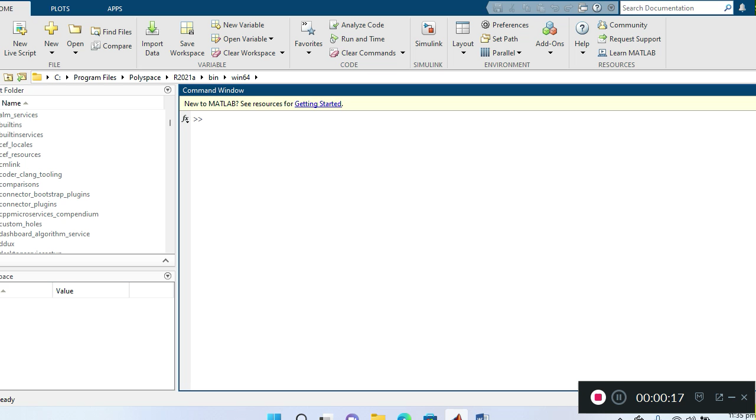So we open straight on to our Matlab and we go to Simulink. In Simulink, we open a blank model, and from the blank model we're going to go to the library browser. When we have the library browser, first let's look for our elements.

The first element we're going to look for is the three-phase source, typed as three-hyphen-phase source. Let's go to enter. Okay, I made a little mistake here - instead of source, I wrote 'cost'. Let me change that to source, and now let's enter. Let's just spell our source correctly, and now let's go to enter. Now our three-phase source pops up for us.

We just drag it and drop it. Good. Now we're going to need an RLC load impedance.

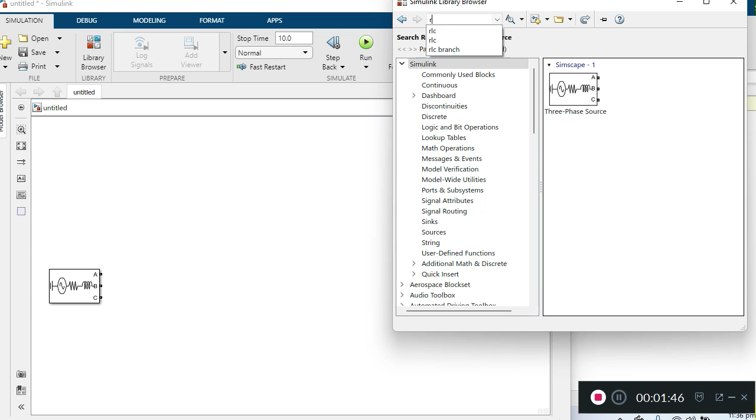So let's just type RLC over here, and then click on enter. Let's see the kind of RLC load impedance which is going to work for us. I think this would work for us, so let's just drop it.

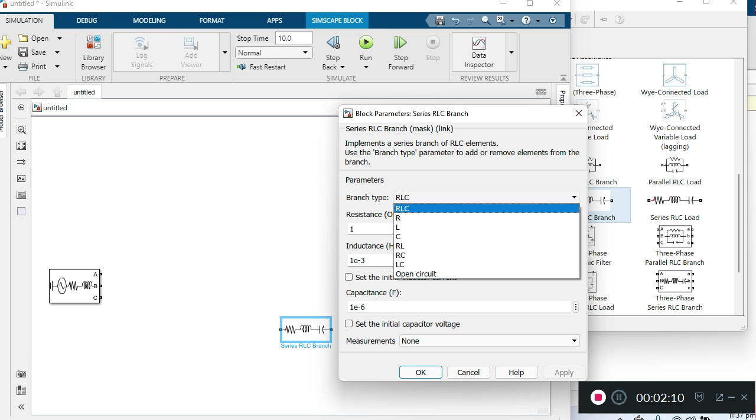We can just double click on it. A dialog box opens for us and we can make any kind of change that we want to our RLC load impedance. I want an RL, so when I choose it, I get my RL, and then I go to OK, and it does everything for me.

Now I want to be able to copy this, so Control C, and then paste it, Control V. So that is cool. Now I want to rotate this, so I can right click on it. When I do, it opens up, and I can select rotate and flip, then clockwise, and it just does it for me.

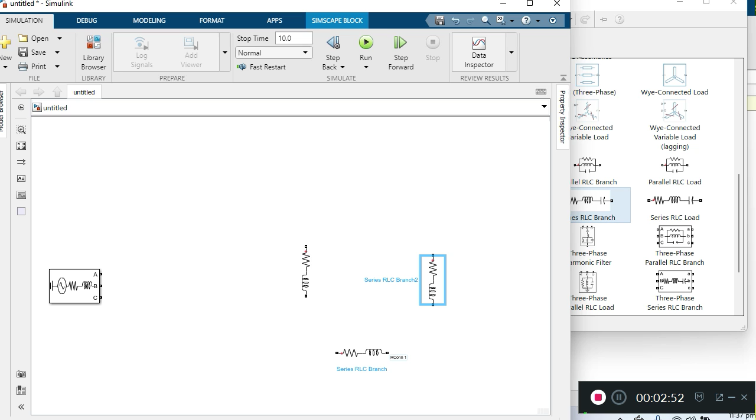Now I can just copy this and paste it. Good, so everything is that cool. Now I can connect my RL loads to form my delta network. So this is a delta network.

If you have a problem with the theory, you can let me know and I can help you to handle it. Now A will go to A - I'm connecting. This part is called the line or the source, and this part is called the phase part. So I'm just connecting the phase to the line or to the source to form my three-phase delta network.

So here is a balanced delta network. If you need explanation as to why we call it balanced delta, you can let me know and I can help you to deal with that.

And then C will come over here. All right, now that's cool. Let me just adjust this a little bit. Okay, cool.

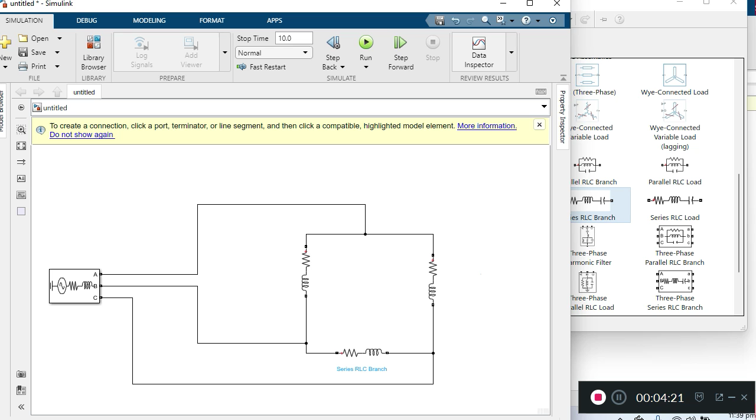Now I'm going to need some instrument for me to be able to take the readings of my voltages. Let me come back here. I can write, let's say voltage - is it voltage? Let me just write voltage measurement. Is it measurement? Okay, let me just check if it's now right.

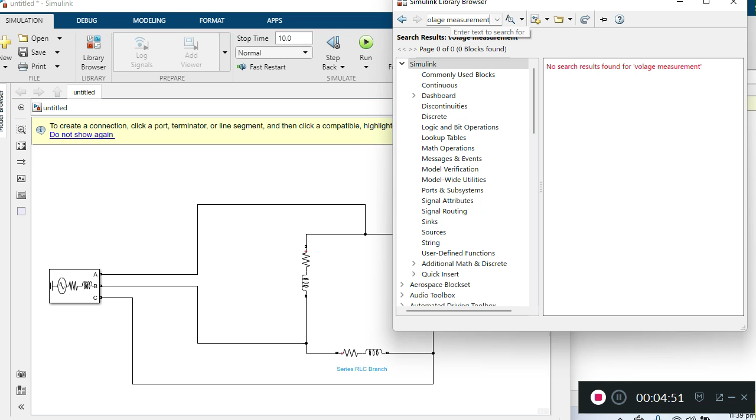I think I've not spelled this correctly, so let me just do it again. Control A. Okay, so it pops out for me. This is my voltage measurement - I'm going to use this one for the voltage measurement.

And then I'm going to need an RMS also, so let me just type over here, RMS. I think it's going to open up for me. Yeah, so I think I should have an RMS here. Let me just look at the one that I'm going to need - which one am I going to need?

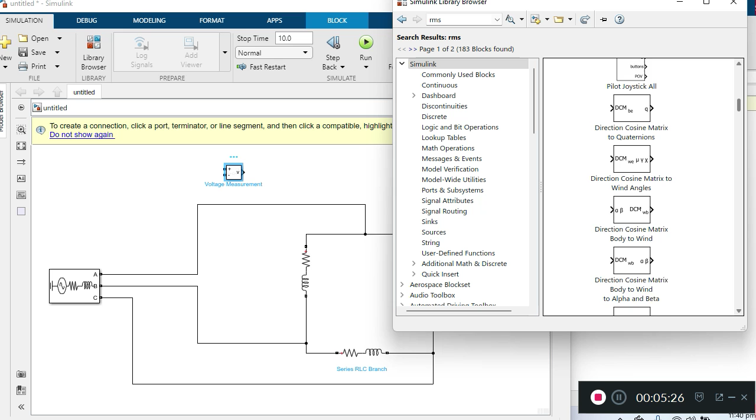Wow, I don't know if I have what I actually wanted. Okay, that's cool. If this method isn't working out for us, we can use another method.

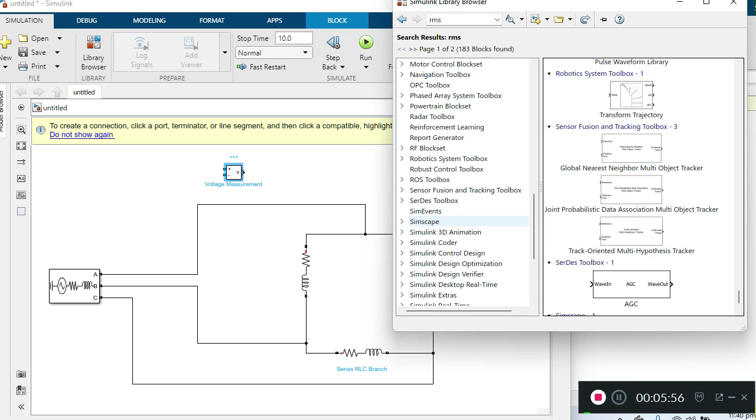Let's drag this one down, and then we'll find Simscape. So let's just click on Simscape.

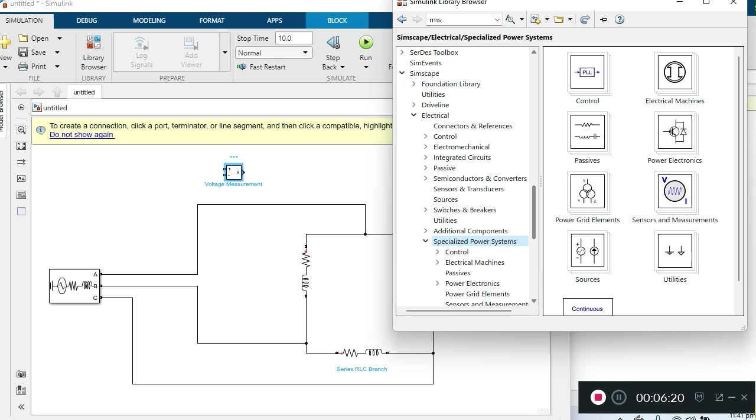When we've clicked on Simscape, let's choose Electrical. When we've chosen Electrical, let's choose Specialized Power Systems, and then let's choose Sensors and Measurement.

Okay, let's now look through this one and see if we can find our RMS. Okay cool, now we've found our RMS, so let's just drag it and drop it here.

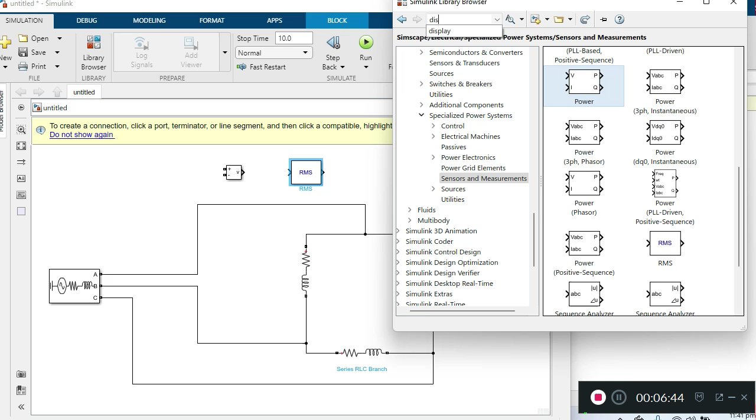That's cool, all right. So now let's just connect our components together. It's just that easy. Okay.

No, your lines must always be thick lines. All right, okay, so always make sure you do have that. All right, so now let's just connect this one here, to A and then to B.

Okay, so now according to the balanced delta network theory, what it says is that the voltage at the source must be equal to the voltage at the phase. So basically the voltage I have here is VAB, so now I'm going to also check the voltage over here.

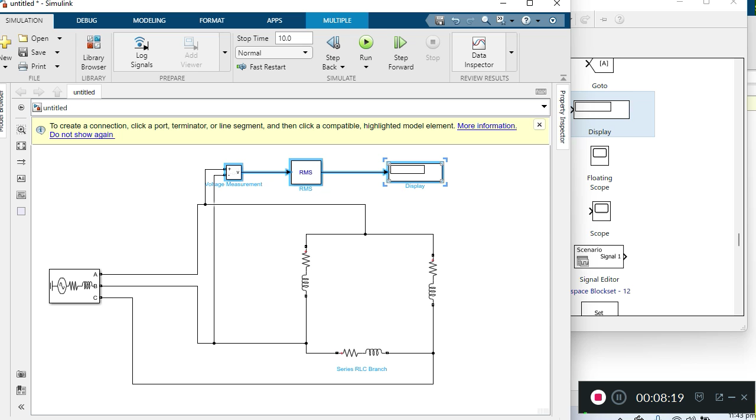So I'm going to need these equipments again, so I'll just copy them. I'll hold down Shift and highlight them with my mouse. Now I'll just go to Control C. Now they are all copied, and I can just paste them.

All right, it seems I have to extend my distance, so I just make it bigger. Okay, so let me see. I can just use the arrow keys to adjust it, and I can adjust this one also to any place I want.

So now I can make this one come this way, and then I can make this one also come this way. All right, so now that's cool. Now I think we're almost ready to go.

But wait a minute, this one is VAB, that means I must also go for the VAB here. But what I have here is VCA, so let me just delete this one and then delete this one. Now let me just take this one over here.

Okay, I can shift this one a little down, yeah, and then I can bring this one a little down. All right, that's cool, okay now let's do the same thing here. Okay, so now I have VAB here and I have VAB here.

According to the balanced delta network, the voltages here are supposed to be the same. So we're going to run our circuit and see if we're going to achieve this. Before we run our circuit, we need a power source for our network to be able to operate.

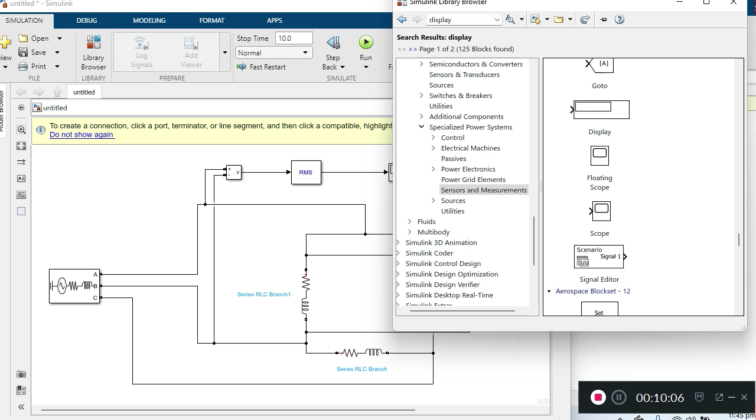So what we can do is let's just go back to our Simulink library browser, and let's type power, okay. So Power GUI, okay, let's go here. Power GUI pops out for us, now we can just drag it and drop it, let me just drop it somewhere here.

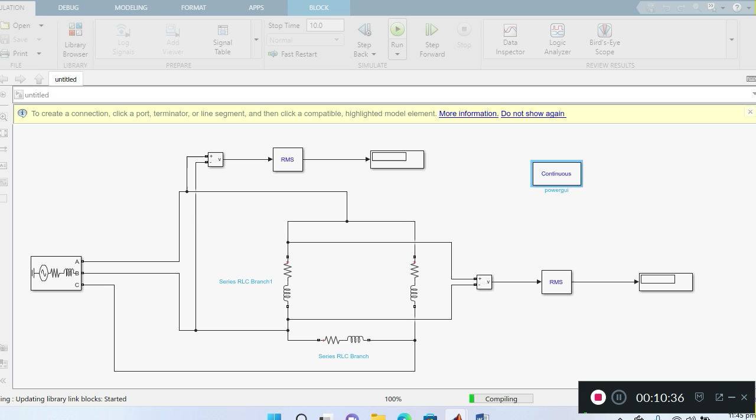And then let me enlarge my screen again. Good, now we're good to go. Now let's go to run, let's run our circuit and see. Okay, our circuit is compiling and it's going to run very soon for us.

Okay, so now we can see that our voltages are the same. You can see that the VAB on the line voltage is 1399 volts, and the VAB on the phase is also 1399. That means the balanced delta network is verified, because the voltage on the line is the same as the voltage on the phase, or the voltage at the source is the same as the voltage at the phase.

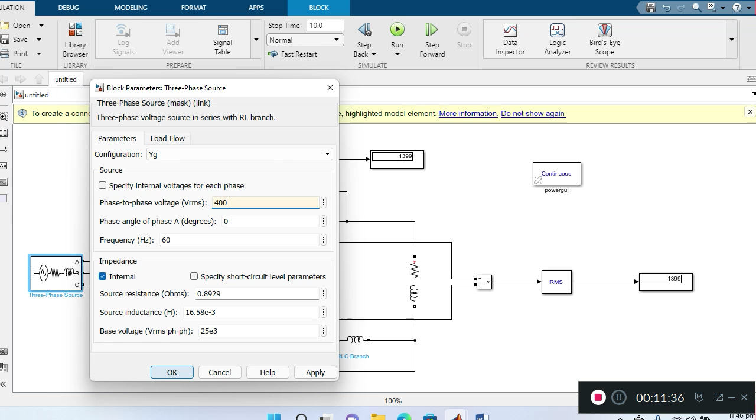You can click on the line or the source and also make any kind of changes that you want. So let's say we want to change our voltage to, let's say, 400 volts, and then we just click. Okay, now let's run it again and see what we get.

Again, we can see that our voltages are the same. We have 22.13 volts on the line, and we have 22.13 volts on the phase. The VAB on the line is 22.13, and the VAB on the phase is also 22.13. They are the same, that is, the balanced delta network is verified.

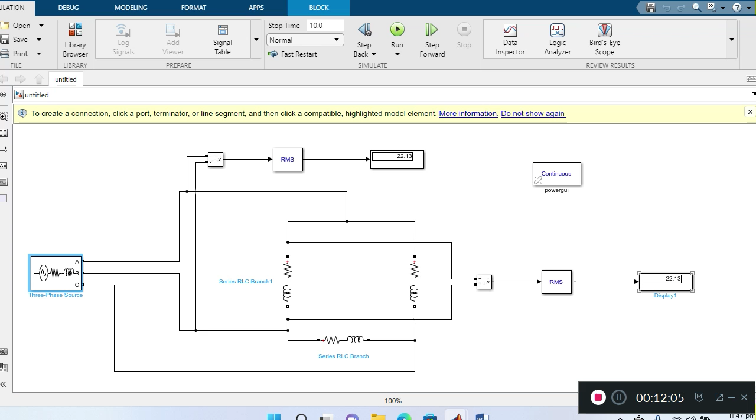Okay, we can go on ahead to check for several other voltages. We can say that we want to be able to check for VAC. So this is VAC, right? And then we can also come here and check for the same VAC. So the first one was VAB, now we want to check VAC. So this is VAC. Okay, so now let's run our network and see.

All right, so you can see the voltages are again the same. That means our network is correct, it's being verified. So this is VAC.

Okay, so now let's say VBC. Okay, so this is VBC. Now let me just... okay, so this is VBC. All right, and then this one, in this case, this one has to change, has to come here like this. And then this one also has to come here like this. Let me just adjust it a little bit, let's bring it a little bit like this.

Oh, did I do something wrong? Okay, let's just undo it. All right, let me just delete this one, and then let me see. Okay. Now let me just check it. Okay, it can be here though, it doesn't really matter. Don't worry, it can be there also, but I just wanted to shift it to a position that will be so clear for you, all right? Okay, it can be here also. So this is also

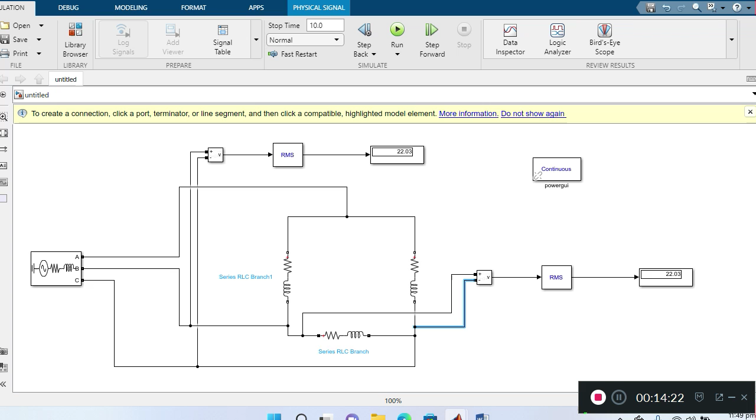VBC. This is VBC, and this is also VBC. So our voltages here is also supposed to be the same according to the balanced delta network. So let's run our network. We see that it's all 22.03 volts and 22.03 volts. That means our network is verified, for the three-phase balanced delta network.

That's the voltage at the source or the line must be the same as the voltage at the phase. So the voltage at the source here, or the line here, the line voltage is the same thing as the phase voltage. We can also go on and do measurement for our current, but you know that with the three-phase delta network, the currents are always different. So with respect to the current, we wouldn't expect it to be the same, but the voltages must be the same.

So let's just go on and do it for the current. In that case, I'll just delete my voltmeter and select current, and select an ammeter, that is an instrument for measuring current. All right, so let me just go on and do this. All right, but we're still going to need our RMS, and then we're going to need our displays. So those ones, I will leave them. All right, so let's just do this.

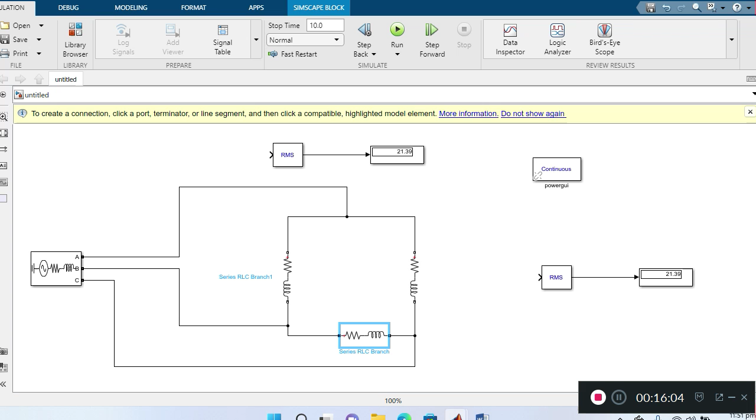All right, let me shift this one here a little bit. Let's go back to our library and type 'current'. So current measurement appears here for me. Let me just drag it.

Voltage is always measured across, but current we measure in series. So let's say this one is IA. Let me bring this here and connect it. This one will come here like this, and then this one will come here like this. Good, and then this one will go here like this.

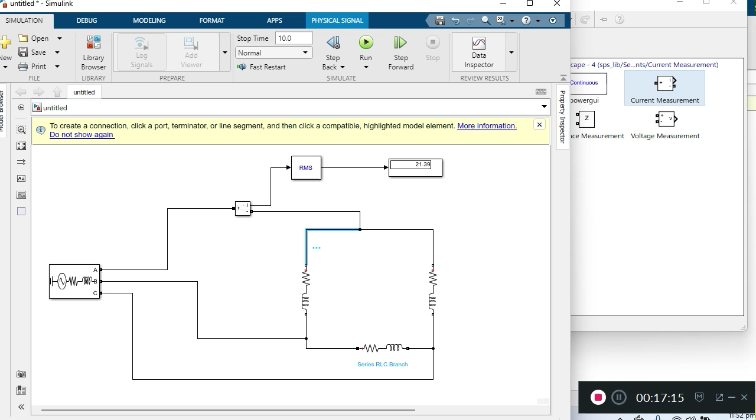IA, which current again here can I measure? Let me also measure the current here. This one is going to be IAB. Let me just go ahead and do it. Let me bring it here.

Okay, I can enlarge it. Now let me put this one here, and let me put this one also here. I think we're cool. Let me bring this one here. All right, all right. I think we are cool.

Let me just see something. Maybe I can adjust this. I can adjust this also. Let me just use the arrow keys to shift them, so that it will be much more clearer for you.

Now, in terms of the current, they are supposed to be different. The voltages are going to be the same at the phase side and at the line side or source side. That means the voltage at the source is going to be the same as the voltage at the phase. But with respect to the current, the current at the source and the current at the phase will always be different. So let's just go to run.

You can see that we have 35.55 amps at the source side or line side, and the current at the phase side is 20.88. So you see that they are different, because the current at the phase side and the current at the source side are supposed to be different with respect to the balanced delta network.

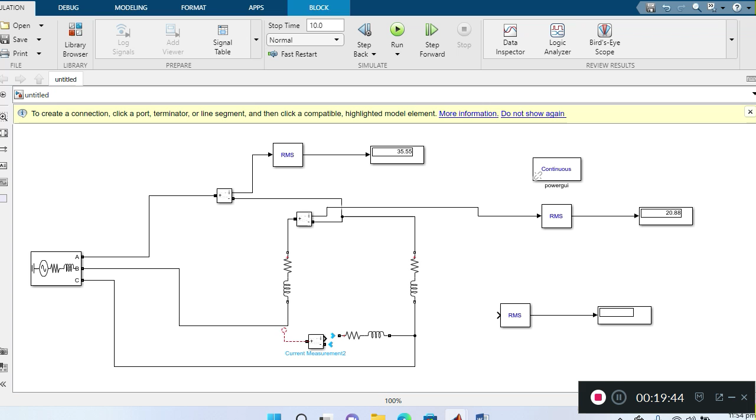So we can go ahead and do the current for different parts of it. Let me just copy this, copy this, copy this, and then Control V, bring it down here, using my arrow keys to switch them, and then I can measure the current here also. Let me copy this and paste it over here, and then connect this to this.

Let me just connect this to this, and then connect this one this way. So you see that I can take the measurement of the current at different positions at the same time. Now let me just go on and do my simulation.

So now you can see that the current will always be different, unlike the voltages, which are the same at the source side and the phase side.